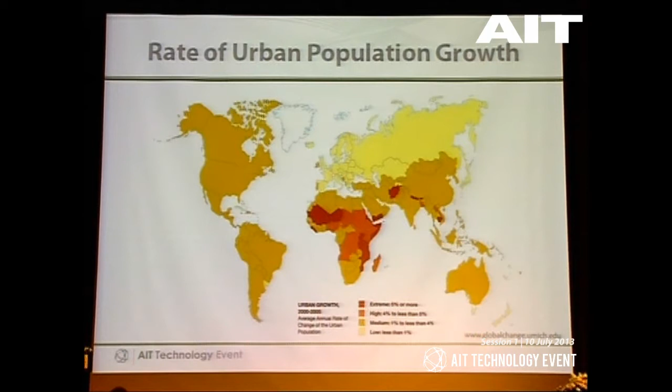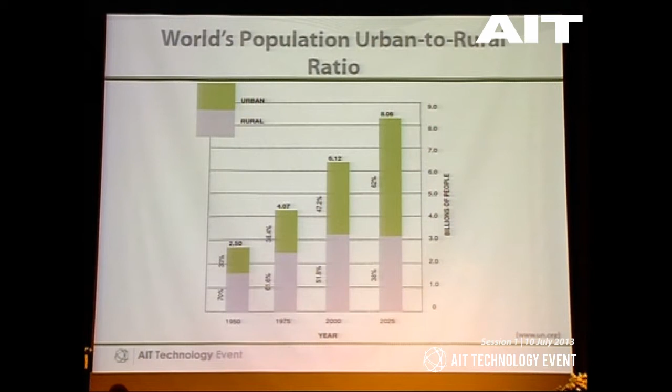This slide is quite interesting and also a bit alarming, and at the same time may present us with the opportunities that we are looking for with tall buildings. If you see here, most of the growth in population in the coming years is going to be in the urban area. So even though rural population is going to grow, mostly it's going to grow in the urban area. That means the urban population percentage is going to grow substantially, which means we are going to be building a lot of housing, a lot of buildings to accommodate this urbanization.

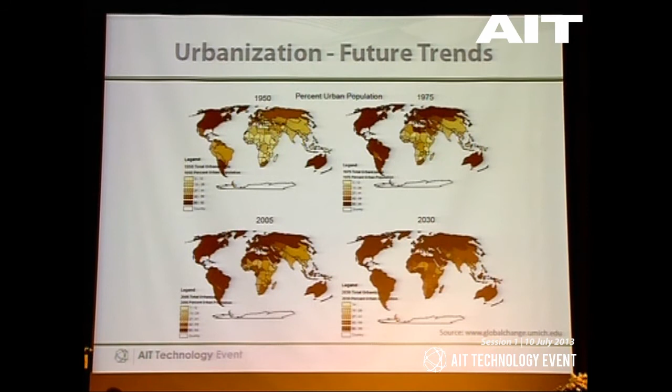This is how the urbanization trend is likely to follow, projected each year starting from 1950 until 2030. You can see gradually the shifting of the color, and all of the countries, especially the region we are living in, becoming more and more urbanized.

So when we look at these things, it's quite obvious we are going to need a lot of construction of buildings for housing for all these people who will move into very tight spots. That means land values will be very high, and the scarcity of land will be there. So obviously we are going to find solutions for this huge demand. If you look at the number of people moving in until 2030, it runs into billions, and somebody mentioned that millions of people are moving every day from the villages to the cities, and there's going to be a need for them to be accommodated.

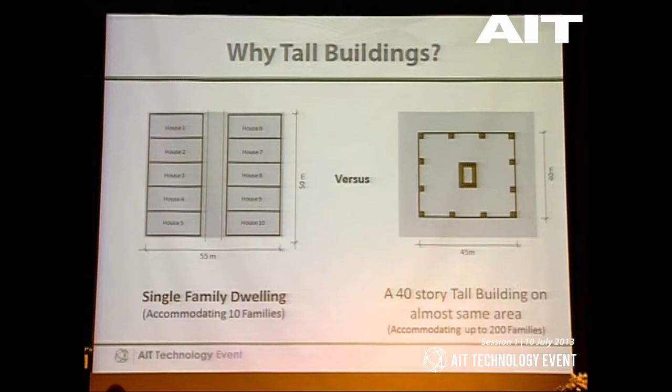So if you look at the comparison, a very rough comparison, not meant to be accurate, but very rough between land use, you can see where you normally would have about 10 houses or 10 families living, with a tall building you could have up to 200 or 300 or 150 living in the same spot. So if the urbanization needs are high and the land is going to be scarce, and also we need to be closer to the workplaces and so on, then obviously the option will be to build taller and higher.

And tall buildings, that definitely is going to be one of the main needs of the future in the cities, and something that we cannot turn away. In fact, I would like to talk to you about the case of London a little bit.

I was there a couple of weeks ago to attend the conference of the Council on Tall Buildings and Urban Habitat, CTBUH, and it was very interesting to see how London and Paris have resisted tall buildings for a very long time, and how difficult it is to build there. Now a few buildings have been approved, and they're building very nice, interesting buildings.

Take the Shard, for example, the tallest building in Western Europe, which is actually not that tall compared to what we build in Asia. It's only 75 stories high, so buildings in China, Dubai, Bangkok, or Manila would be higher. Still, it's currently the tallest in Western Europe. It took 10 years from conception to completion because of the approvals, public hearings, and criticism they had to go through, but finally they were able to build it.

I had the opportunity to go on top of this building and look at the view of the city from there, and it's obviously very interesting.

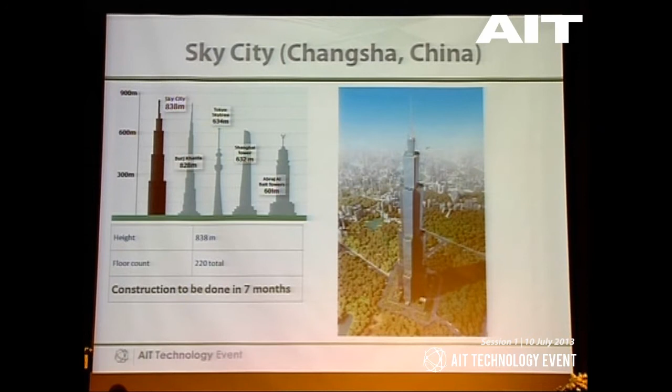So we can see that the technological developments needed to build buildings so high, so fast, are going to be totally phenomenal—nothing like what we have seen before.

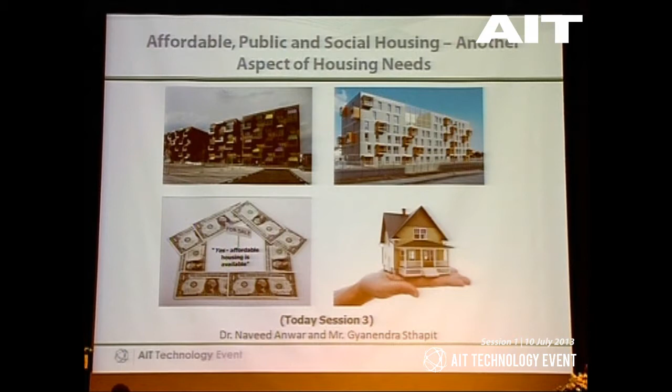But at the same time, we cannot forget or neglect other needs. As has been pointed out, as this kind of development grows, there will be a lot of need to also develop housing systems for people who will not be able to afford or live in this area. We have a presentation in the afternoon talking about social and affordable housing.

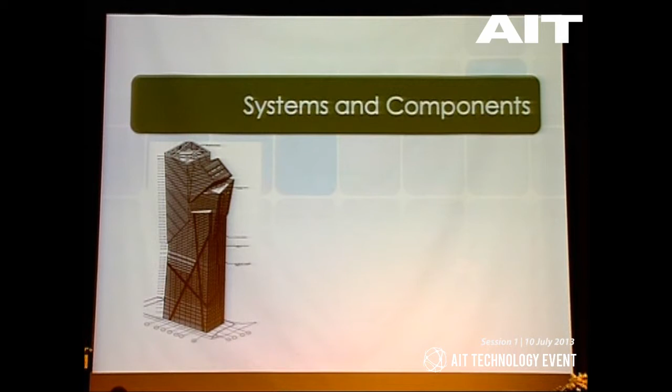So coming to the components of a building—now we are going to talk about how we can build a building with high performance and lower cost. Let's look at the systems first.

Before I go any further, we need to know that building is not the structural engineers' domain entirely. There are many other professionals and systems involved. Two main important systems are the structural system, which houses every other system, and the vertical transport system, which is the elevators.

If you go to world conferences on tall buildings, you'll mostly find two types of people there: the structural engineers and the elevator people, because they're developing technologies very fast. In fact, one recent innovation award went to an elevator company for tall buildings, because they developed a new carbon fiber that allows elevators to be much faster and much taller. But that affects structural engineers, because faster elevators need fewer elevator cores, meaning less structural system left for us to use. So development in one technology may actually not be so good for the other discipline.

Since this is an interrelated, interdisciplinary project, everybody has to work together on the building system. But the structural system, being the core skeleton on which everybody else puts their systems, is critical. Just as we have many systems, we also have many members of the team in a tall building. We respectfully agree that the architect is most likely the team leader, unlike bridges where the structural engineer takes the lead—here structural engineers and everybody else work together, and it's a huge coordination problem between all these disciplines.

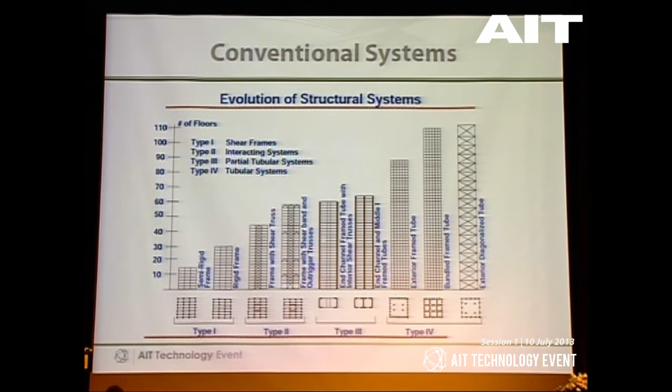Now there are variations of these systems which are leading to taller and taller buildings. If you look at the story range, the tall building range finishes at about 110 stories, and then we start with the ultra tall range, which is now extending its boundaries up to 200 or 250 floors or even higher, and that's a totally specialized and different era.

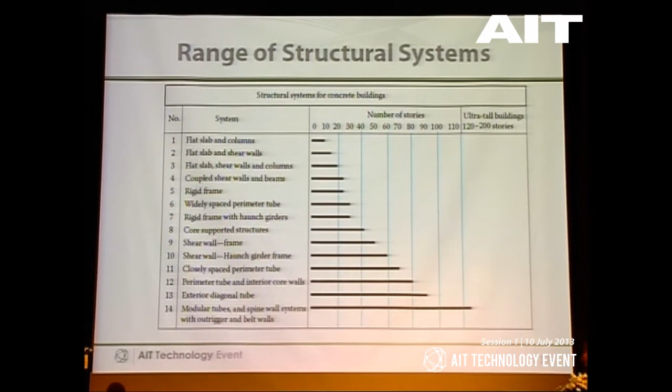Not everyone of us may have a chance to work on an ultra tall building, but we will see more of them being built. In fact, if you look at the development in the last 10-15 years in tall buildings, almost all of the tall and super tall buildings have been built in Asian countries, mostly China and the Middle East, and some now coming in this region also. So we can clearly see the field of structural engineering is going to another era, the super tall buildings, which will need higher technologies, newer systems, and newer techniques.

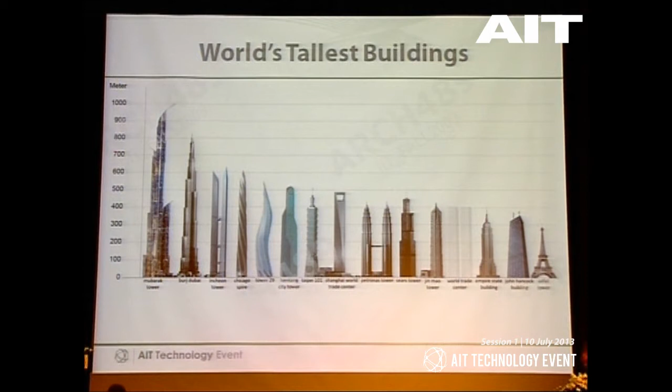This is just a snapshot of some of the buildings, quite common, you can see it on the internet everywhere. You can see how the Eiffel Tower, which used to be the tallest structure on Earth at some time, is now dwarfed by all of these tall and super tall buildings which are coming up. Every building tries to be taller than the previous one, and this trend seems to be exponential, not linear.

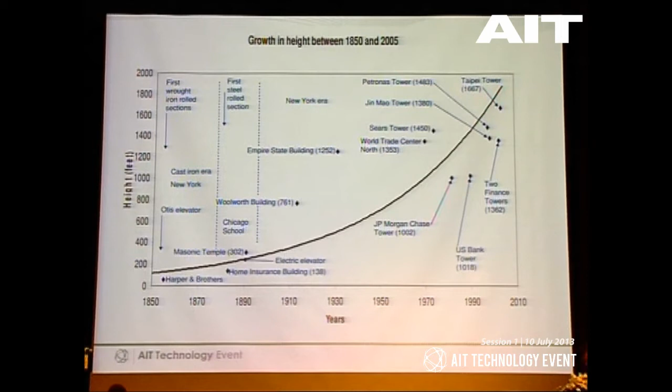Since the 1950s, or 70s, the trend to build faster and taller has actually accelerated. Now we see that buildings are becoming taller at a much faster rate, and this is all thanks to the developments in the transportation system, in the computing systems, and so on, some of which we will talk about.

The other system which is coming up now, which is becoming quite popular in addition to the conventional system, is the diagrid system. This has been exploited quite heavily in Dubai, buildings in the Middle East, and also many new buildings in England and Europe are using this system.

In fact, one presentation in London made by a senior engineer was comparing whether these diagrid buildings would be suitable for seismic zones or not. It was concluded that they may not be, because of the very large stiffness that they carry and the low ductility that they may have. So one solution which may work in a low seismic zone may not work in a high seismic zone.

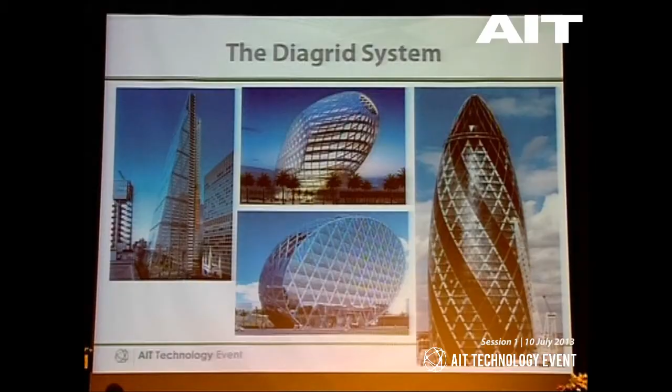So diagrid systems, or maybe some modification of that, will be developed which will be adapted to the seismic zones in the future. One of those developments is the BRB, or buckling restrained brace system, which can replace the diagonals in the diagrid, or be placed strategically so that they will absorb the energy, or provide the required ductility in the system, which is otherwise inherently very stiff and brittle because of the buckling of the diagonals. The use of these BRBs is also now becoming popular in Asia.

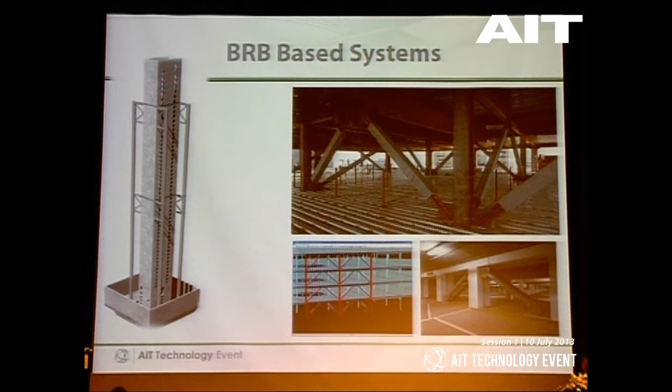We had the opportunity to work on one tall building in Manila. In fact, the designer of this building is also one of our audience, and he will be one of the panelists in the afternoon session. We also use this; some research is being done at AIT on the effective use of BRB, not only for tall buildings, but even for smaller buildings, 4 or 5 story high buildings, for retrofitting and improvement of seismic performance.

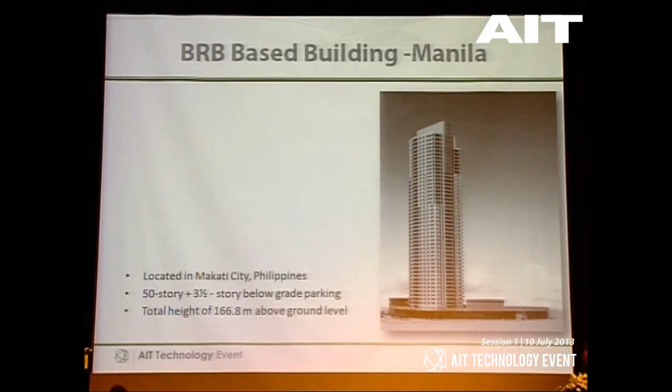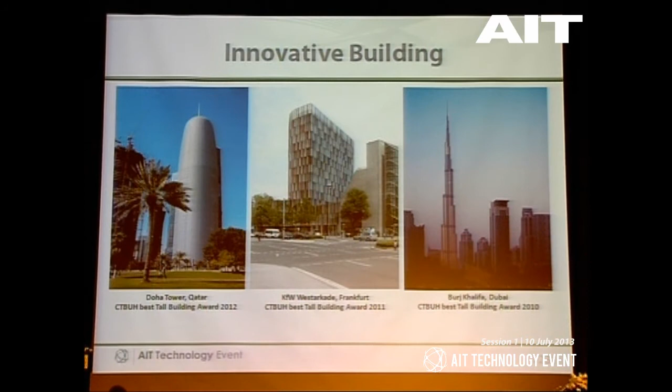This is the building that I mentioned, which is in Manila, and it's now completed. Some other building awards - these are pictures I took from the awards given by the Council on Tall Buildings and Urban Habitat in various years, starting from 2012, 2011, 2010. These are the buildings they awarded as the top innovative buildings of that year, just to give you an idea of the developments going on in building designs.

Now we can see that there are so many structural systems to choose from or to develop. The question is, how do we select a system? How do we weigh the choices between a system? How do we say which system will be better than the other for an application?

For that, many formal and informal methodologies are available. Most of them have to be multi and interdisciplinary in process because many professionals are involved. So we cannot optimize or select the system based only on one criteria. We have to keep all the other criteria in mind too.

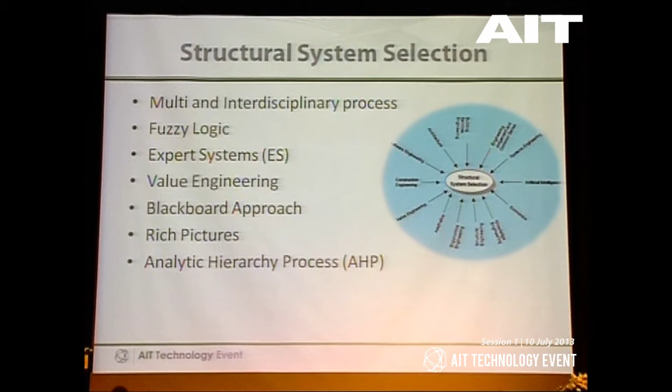Things like fuzzy logic, expert systems, value engineering, blackboard approach, rich pictures, and analytical hierarchy process have all been used to help in the selection of the system in a more formal way. Of these, I will briefly mention two in which AIT has also done some research and work in the past on some projects. One of them is AHP, the analytical hierarchy process, which can be used as a tool to make choices or compare systems and select the systems with the appropriate value.

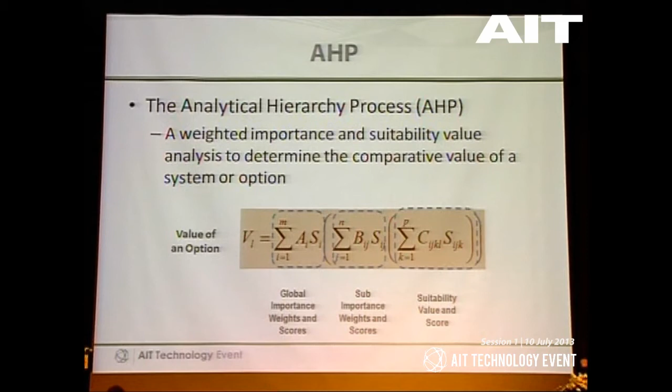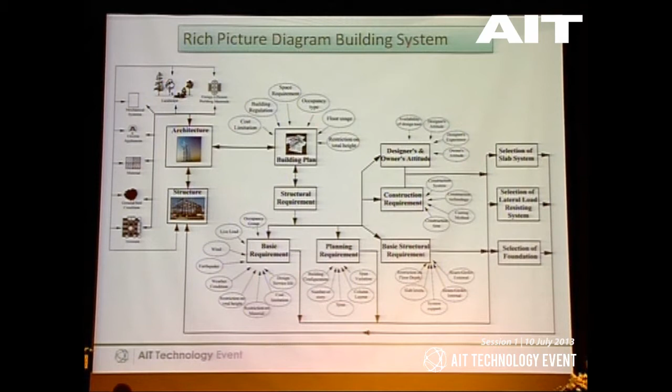The second one is the rich picture diagram. This is actually by one of our students. She's also an architect and also designed this room layout for you. She has done some work and prepared a rich picture concept for the total system interaction between various parts, various disciplines, various systems, and so on. These concepts, which go a little bit more than our conventional structural engineering, will be useful for helping us choose the systems.

Let me now come to the important aspect of cost and performance. First, the question would be, what cost are we looking at? Because cost can be defined in many number of ways. Then we also have to see what factors affect the cost. How to reduce the cost is the key, obviously.

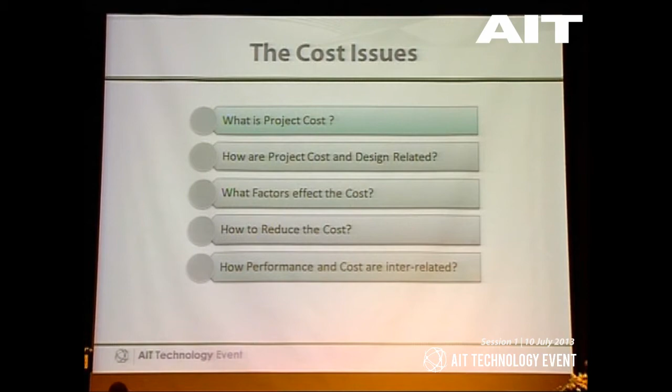But at the same time, what is the relationship between cost and performance? Is it that if we reduce the cost, the performance will go down, or is it that we increase the performance and the cost will go up? These are the basic questions that we can address.

The cost can have many components depending upon who is looking at the cost. It could be financial cost for borrowing the money from the bank, planning and design cost, construction cost, and so on and so forth. I don't want to go into the details of each one, but even if you look at the emotional cost, I may say a few words about it.

There has been a study by psychiatrists that people who drive through an urban environment which is ugly or not good to look at get depressed by the time they reach the office, and they perform less than people who don't have to drive through those places. So there's a direct correlation between people's output, their emotions, and their getting angry or not, depending on whether they drove through a nice place with nice buildings and bridges, or not. So that also has an impact on the total cost.

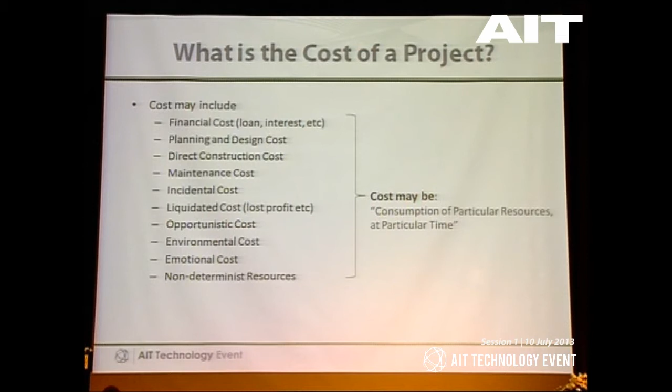So broadly, cost is actually the consumption of particular resources at a particular time. That's the cost of that thing at that time. Sustainability may be a broader term which includes all of the costs at all times. We will look into sustainability aspects later. Also today in the afternoon, we have a very interesting presentation about sustainability and what makes a building green or otherwise.

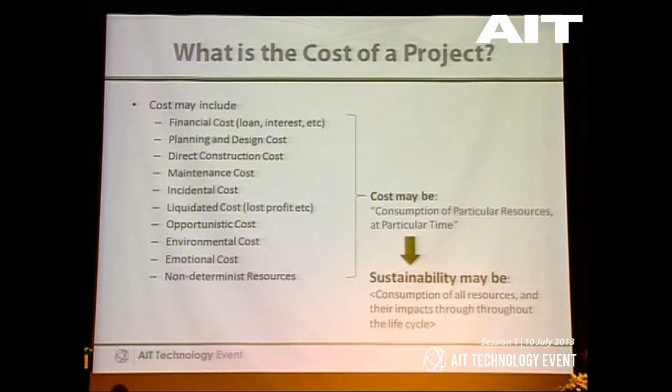So basically, one of the things is we should build to last. Buildings should have longer life so that the consumption of resources can be reduced over the life cycle, or over several life cycles of the buildings. I will leave this to the afternoon session.

Another thing that's needed is, once we construct the facility, how do you monitor its performance in terms of cost, energy use, resource use, need for repairs, and everything else. So the monitoring, evaluation, and managing of built facilities is just as important as designing or building them in the first place. Again, we have a presentation addressing this topic in the afternoon.

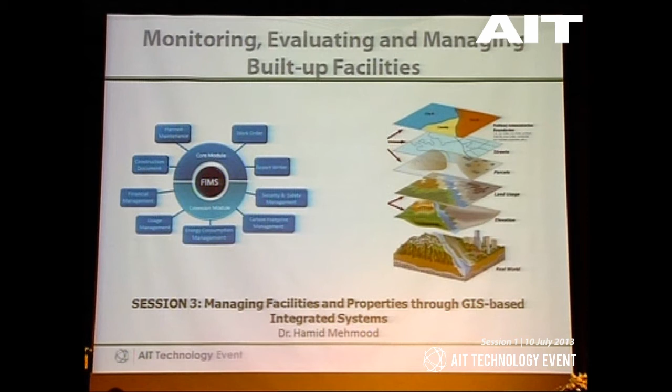Now let me come back to the question of cost and performance. There are three ways we can look at cost and performance. The first is the easy one: if you want higher performance, you spend more. That is the general feeling — it may or may not be true, but it seems to be true. Second could be that we want to increase performance at the same cost. Or third could be that we want to get the same performance for a lower cost.

The real challenge is on the second two parts, which is to either increase the performance for the same cost or reduce the cost for the same performance. So what do we need? First, a measure of performance so we know what we're measuring. Second, a measure to evaluate cost effectiveness. Once we have these two measures, we can move ahead with development.

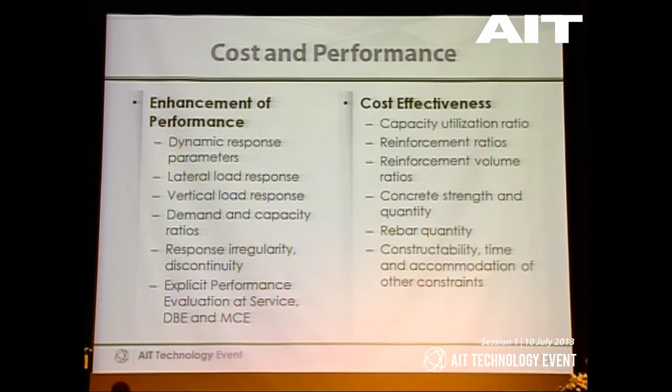The enhancement of performance from the structural point of view—not other performances like dynamic response, lateral load response, irregularity, and so on—involves many explicit parameters. Cost effectiveness could be capacity utilization ratio, reinforcement ratio, concrete strength, rebar quantity, in any number of ways we want to define it. Both performance and cost can be defined in many ways that we want to compare.

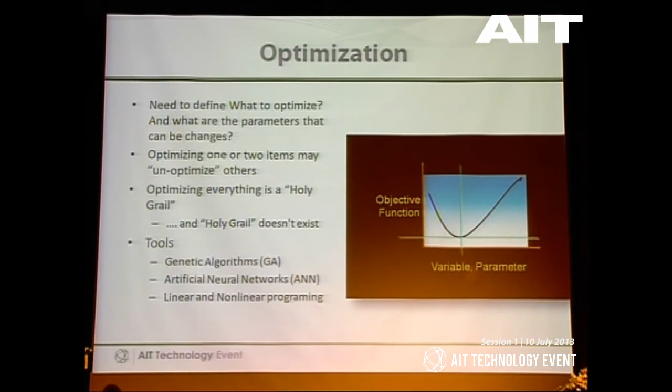Obviously, one term we've all heard is optimization. This is something that is actually very, very hard to do—in fact, impossible to achieve in a given system, and I'll explain why. The optimization can be done at many levels: it could be micro level optimization, system optimization, or component optimization, and so on.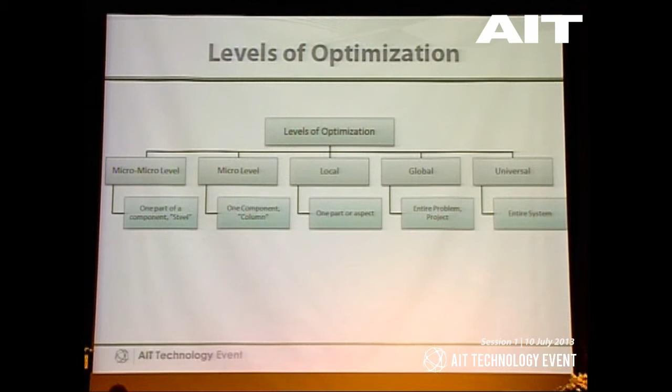When we talk about optimization, even if we optimize one thing, it might produce unoptimized results for another. For example, a good solution for structure may not be a good solution for environment. So the total optimization is lost when we compare the overall system combining structure and environment. I'll give you a simple example to make this point valid.

Let's look at a small building—a 15 or 20 story building—and the design of the column for that building. If you forget about earthquake and everything else, just the gravity loads, the change will be something like this. We can see there will be an increase in the load as we go down.

Everybody knows that. So if you want a column completely optimized at every floor level, you'll need a column size that may be different at every floor, a reinforcement ratio that's different at each floor, or concrete strength that's different, and so on, so that no two floors have the same design. Is that optimized? You could say you've optimized one column for that loading, but the entire column is not optimized, because people have to change the formwork, change the reinforcement cage, and many times it's not even practical to provide exactly what you want.

So local optimization of one column will definitely produce an unoptimized solution for the entire column. And if you compare many columns, they can't all be different—many have to be the same. This means we cannot produce an optimized solution for a building purely on local optimization. Also, there are so many choices for the column section that it's unbelievable how many things you could do to carry that load, and we would almost never finish the column design—the building would be completed before we finish it.

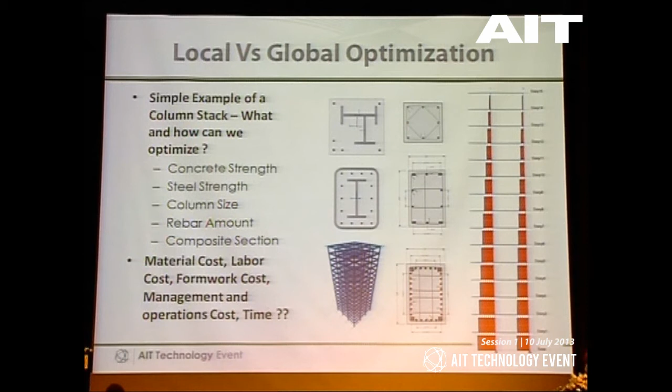That means we've designed for about 70 to 100% efficiency. If you design for less than that, it's uneconomical. If you design for more than that, it's unsafe. So we have to be somewhere in that range, whatever range we define, and try to bring most of the structure into that range. It's practically impossible to have all the structure there, but the target should be that most of our utilization of resources or material falls in the range that is economically feasible.

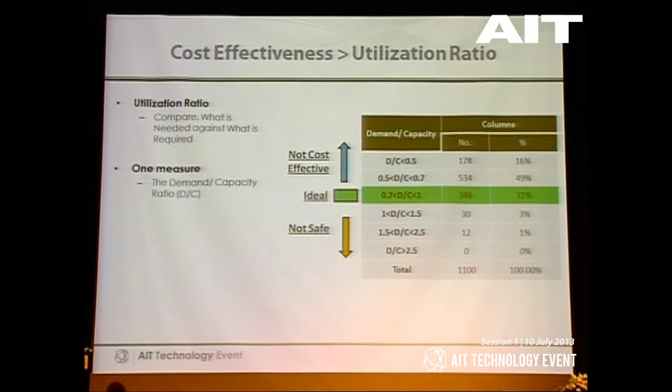So these measures can help us, after we finish the design, evaluate the utilization ratios and see whether our structure is cost effective or not. If not, we can try to change the design to bring it into this range. Another side of the coin is how we can improve performance without affecting cost. Now, this is a very simple example again.

I'm just giving very basic examples. This is the reinforcement in a shear wall, and on the right-hand side is one performance measure of the wall, which is the moment and axial load capacity. The line here represents the original design, basic design with uniform reinforcement like this one.

We could achieve higher performance by simply redistributing the reinforcement in a more efficient manner so that the cost is not increased, but the performance is increased. Or if we want the same performance, we can take out a few bars from this wall and reduce the cost while getting the same performance by rearrangement of the reinforcement.

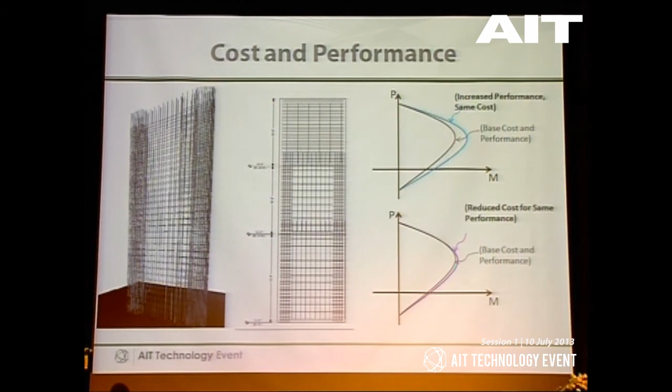So these are extremely trivial and basic examples, but they provide us the direction that there are opportunities for performance enhancement and cost reduction within the system by innovative thinking, by looking at things critically and finding solutions. Cost and time are related.

Time is money, everybody says that, and in construction it really is. If you finish too late, you cannot collect the rent too early, and so on. So we have to balance the cost and time in a very difficult way, because sometimes if you want to reduce the cost, you have to spend more time. And if you want to finish something quickly, you have to spend more money. So there's a balance between cost and time, which are both, in a way, money or the cost. That's a challenge we also have to consider.

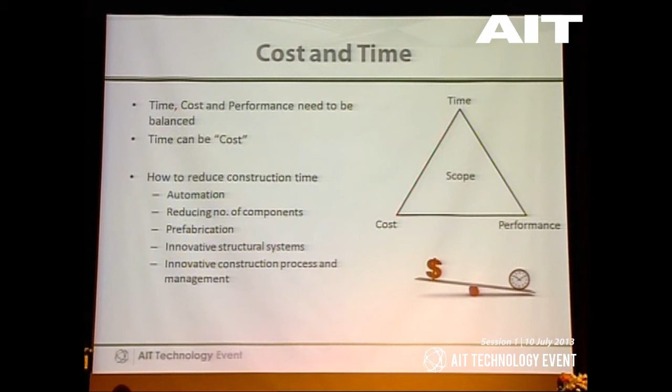And there are techniques that can reduce the time without increasing the cost. I will just show some of them later.

Let me just check, how much time do we have? Oh, okay, right, so I'm way slow. Okay, I'm way slow then. You should have given me a warning, John.

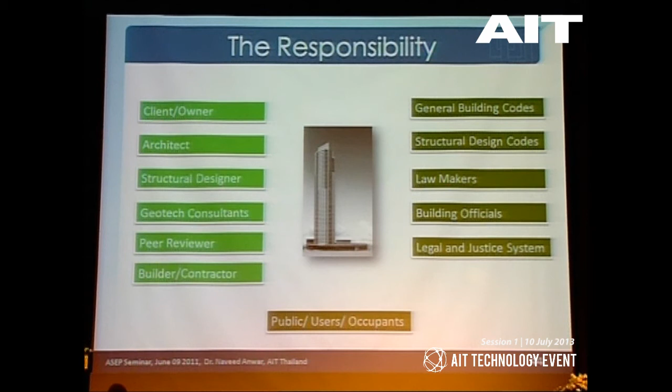Okay, so very quickly, let me just say I have to quickly go through this one. We want to see what is the responsibility of a building, who has the responsibility of the performance of the building ultimately, and these are the people who are involved in a building. So if something goes wrong, who is responsible? We can't really point the finger.

But if you look at very old code, and I will not spend too much time on this one, it was written that if the building is not constructed properly, which is the implicit specification, and it falls down and kills a person, which is a performance criteria, the builder should be put to death. We are lucky that we don't have those direct laws as strict as that right away. But this is a clear indication of the specifications of the performance and the consequence.

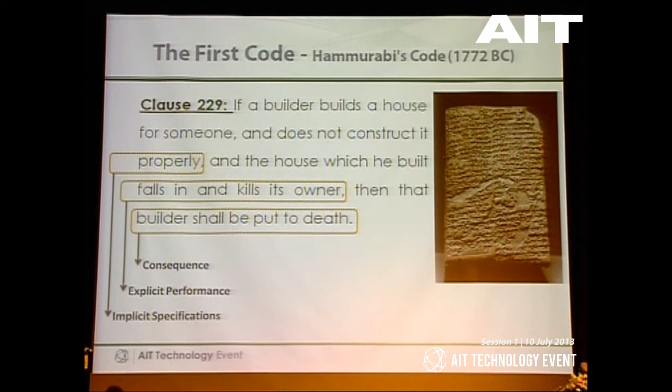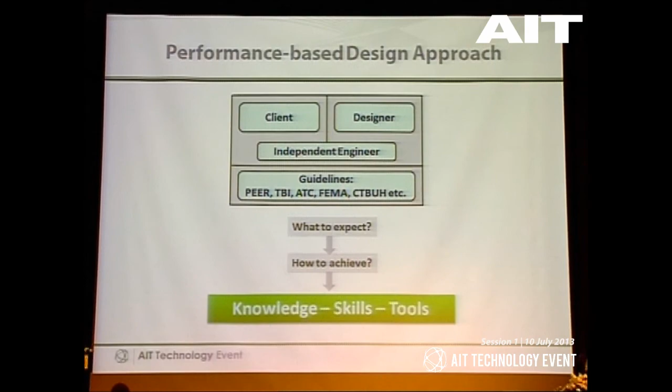This is where our industry is leading in terms of... I will skip and go right to this slide. So basically now we are talking about performance-based design, in which the client, the designers, the independent engineers, the guidelines, they all come together and decide what to expect and how to achieve it, and that requires knowledge, skills, and tools, which is actually technology. So to do this, we need to have the knowledge, the understanding of the knowledge, the skills to apply the knowledge, tools that we know how to use, and rightly apply those tools to achieve the performance.

And now the performance design is also going through another evolution. The first stage was just the limit states of the performance, immediate occupancy and so on. The next one is also talking about the replacement value, the dollar value, the casualty rate, the downtime in days, how much longer it will take to repair. So all those things are also becoming part of the performance evaluation. In fact, it's going to the next step.

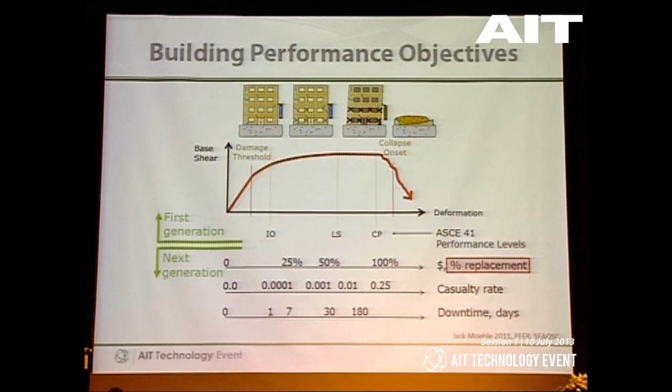And these are some of the guidelines that are used. Dr. Pennung will talk about that in the afternoon, about the earthquake and wind impact on the performance. Dr. Noppadol will talk about the foundations in that context. So we will have two more presentations on this one.

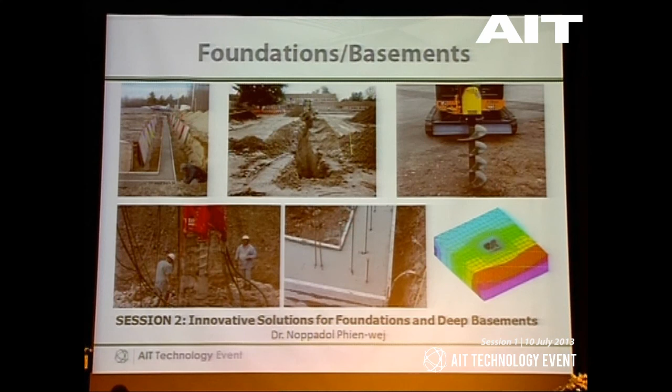The last thing I would like to emphasize is that the next stage is consequence-based engineering. That means we cannot simply say, as in the past, I follow the code, so it should work, but I don't know the performance. Now we have to find the performance, and we say performance is good or bad. But what if the performance is actually not achieved during an event? What is the consequence? So we also need to look at the consequence, and that requires a much more interrelated and interdisciplinary approach to the whole problem. We also have some presentations about risk and so on in the afternoon.

So I think I've completely run out of time. I have some more things to talk about. Maybe if we have time, we can present it another way.

Thank you so much, John.